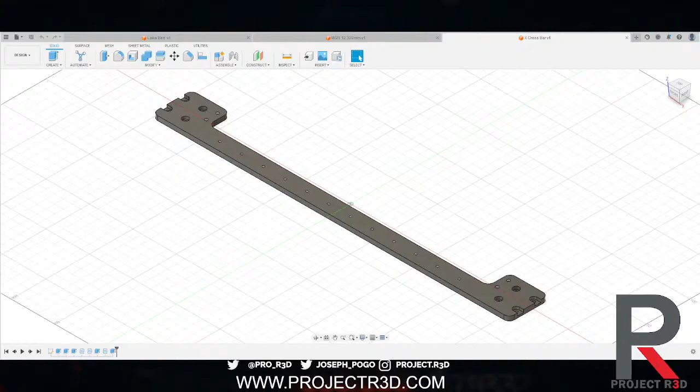I don't think we got anybody yet, do we? Well, maybe. Looks like we do. Are you on both? Oh, I'm on both. Oh, okay, it may just be us. So I just got the files pulled up from the old Apollo. Oh, we're getting some people. On which thing? YouTube, Twitch. Oh, YouTube's still quiet. I'm in the chat. Homie, it's me. Hi. What about chat? I try to chat, and it's like, no, you gotta sign in. Like, it's me.

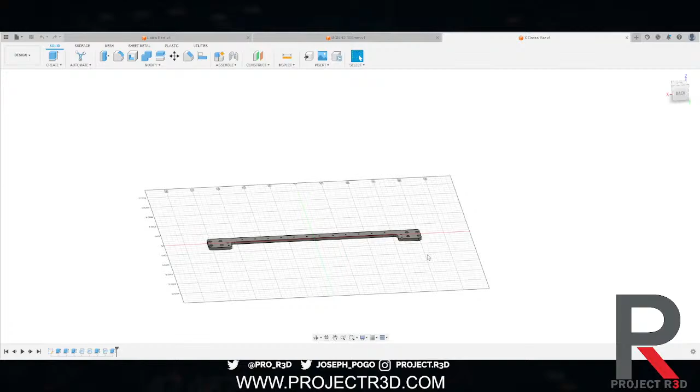Maybe this will show us a little. Nope, this was not even going to show us anything either. I got to find the right file to show you guys. But anyway, so we had the Apollo, you're going to see a couple of the files. So if you can see here, this is like a Prusa style bed mount, but yeah, it was a bed slinger. That's what we tested our breakboards on, which right now are sold out on the site, but we plan on getting some more in. And another thing we did was we were running the Duet 3 Mini. So we have a handful of parts left over from the Apollos, one of them being this... come on.

This crossbar - and this is how it was oriented on the Apollo.

You may hear my dogs yelping in the background momentarily, but can you hear them, Brandon? A little bit once in a while, but yeah, they've been pretty good. We can't have all the dogs up today because one of our dogs had a tooth pulled yesterday.

So anyway, we have some parts left from the Apollo, and there was a handful of things we liked from the Apollo that we wanted to keep around. One of them being the bed.

Do you see this? It's called a Laika - I don't know if you can even see that on here, but this was titled the Laika bed just because that was our initial name for the Apollo. Anyway, this is actually an MK3, so your MK52 style bed, 24 volt. We had them made by LDO. They were really nice. The big advantage is the flex plate.

The flex plate is one of the shining factors of this specific bed - this flex sheet that they're made everywhere. Everybody has an MK3 flex plate. If you want to go with...

What's their names, the guys down in Florida? PEX, the guys who make PEX sheets. I'm trying to think - Filamentum or... no, not Florida, yeah they were down in Florida. What was their names, Brandon? They're still around, they make the slap mat, they make the flex plates - Wham Bam? Wham Bam, so Wham Bam's got their own. Oh, I don't know, see what you're thinking about. Filament, they make their own. Gizmodorks? I think they're just a random place, not anything too crazy. I think they were around for a hot minute a while ago. Yeah, they sell filament and a lot of different things. Gizmodorks - oh yeah, you used to be able to get Garolite sheets from them back before anybody else had Garolite sheets.

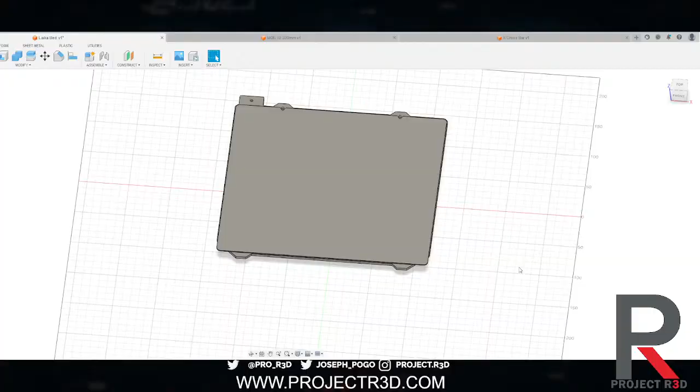Anyway, so everybody had these flex plates, and that's the big thing - if you want a specific blend, a specific way, you can do it.

So we want to keep this bed because we also have a handful of them. We already have these rods, or these cross braces, already milled, so we want to use them, and they're almost a perfect size. So the Apollo was a Core XZ.

What we want to make is a Core XY. So we do have a list of things, goals that we've set for ourselves. Right now our goals for this are: we want to be sub $1,000, it's going to be a kit printer is what we're thinking, fast as possible, easy to assemble. One thing we want to do is make it to where we're going to build a halo.

So we did a bunch of test fits for this, and we can show you some of those. This fit up was kind of our test - we'll put rails in the bottom for our Y, a rail on the top of this carriage for our X, and we're still able to use all the holes and everything like that.

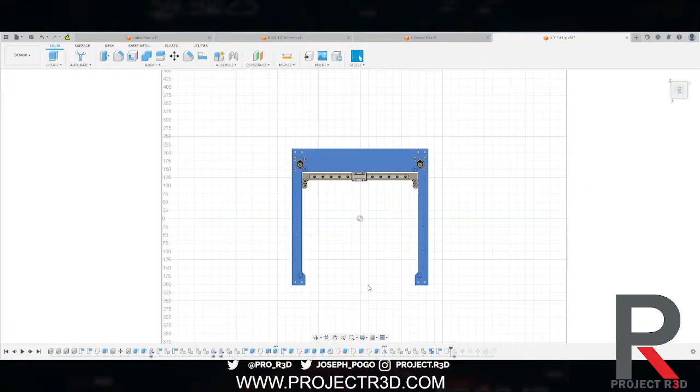A couple things, Brandon, if you want to add them to that list of goals for that sheet, is we want to have the ability to use the touch off system, the endstop.

Similar to the one that's off the build plate. Or are you talking about the magnetic one, the Euclid probe? Yeah, the Euclid probe. So we're going to insert a DXF because we have the original one that we worked from, and we're going to work from that.

Just call it the horseshoe. It gives us some kind of a design here. I don't know if I should rotate this. No, okay. So one thing was, on the original one, we were countersinking these bolt holes for the motors.

Well, if you do that, it limits the ways you can manufacture it. And one thing we want to do is have as many options as possible. We're making this in the U.S., we're a U.S. based company, we have to pay U.S. wages, but we want to be able to keep the price of the unit itself down.

So what we would do is go with 6.35 millimeter thickness. Of course we're going to work in millimeters, that's what we always work in here. So 6.35 millimeter thickness gives us a quarter inch plate.

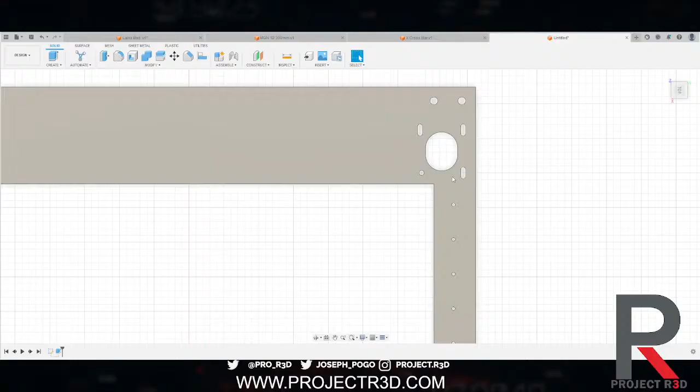But not having countersunk holes allows us to utilize different manufacturing methods. If we were to do countersunks, are those counterbores? Angled, yep, so they'd be counterbore. So if we counterbore these, so the heads of the bolts could sit recessed in the extrusion, we'd be limited to things like standard milling, using a vertical machine or a router style mill to machine this. If we stay away from any counterboring, we can utilize fiber laser.

Or you could do water jet. Water jet is super inaccurate when it comes down to holes like this - these are M3 holes. Another problem is we want these to be accurate, because this hole here is 3.5 mil, that's what it's set up for, a hole size set for an M4 tap.

So right now, the majority of this that's not going to change is this back right here. This area is pretty solid, the motor placements and stuff like that should work very well. We do have to add something here for being able to mount the third linear rail for the Z, so we're going to have a 3-point rail system so we can actively tram our beds. We want to be able to do that, and it'll be pretty accurate.

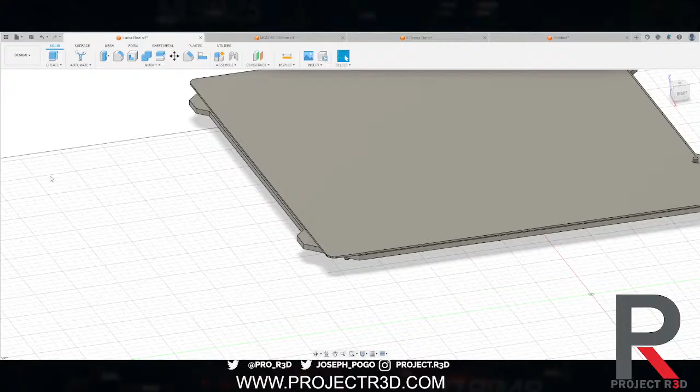You can, if you look at Prusa, it tends to stop the line - let's look here, pull this back up, sorry - it tends to stop the line like right here.

If you look at the bed at the bottom, the traces don't go all the way to these edges. So you can try to print all the way up here, but you're going to be limited on your heat dissipation from that side of the bed. So we kind of want to keep it in that area.

So what this is going to do is place this printer in between something like a Voron 0 and all your Prusa style printers for build volumes. It'll be in between those. Really, it'll be right around that Prusa style, but less than your 300 by 300.

But you're changing out that extra space if we went to a 300 by 300 for ease of flex plate accessibility, right? But also we would have to make a custom bed. And the way we make custom beds, we don't make PCB beds like this ourselves. We would have to go with something like a Mic 6 plate with a silicone heater on the back. Problem with that is cost, really. And since we're doing a belted Z, the weight of the bed is going to be one of our biggest issues. We don't want it to be too crazy heavy.

But one thing we want to do with these streams is design this whole printer live. What we'd like is if somebody has an idea, a suggestion, a desire to have a specific feature in a printer, let us know. We would like to incorporate those things.

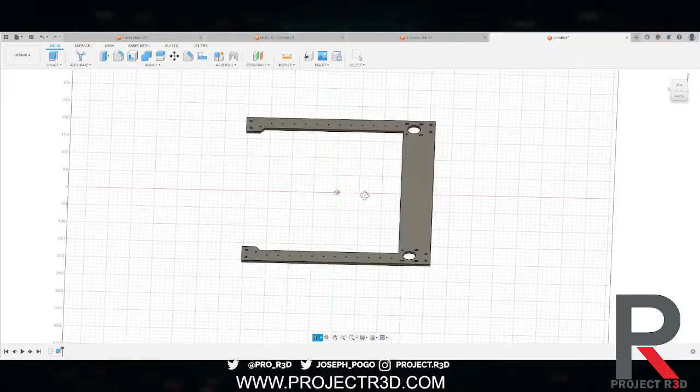So we do have this. What we're going to do first off is probably cut the fronts of this part off, because we're probably going to want to extend this, since I have some new ideas I'd like to try.

So we're going off of... no, is the Talos a desktop printer? I mean, it depends on the size of your desktop. Brandon, did I not talk about having a platform to go under it to put the filament in? So it's kind of a desk. It's kind of a desk.

So the idea would be I'd like to extend this out, mainly because if we look... let me pull up our old one so I'll be able to reference back to it quite often.

I'd also like to share this file online so people can tweak things to it. If people want to build this themselves, feel free, by all means. There are a lot of new ways to make printers now, which is awesome. A lot more things that are accessible to us.

Another thing we need to come up with is a name for this sucker. Right now it's called New Project. Before we were calling it Project Mercury, just because of Project Apollo, but those were internal names. We can't really go Project Mercury for release. Well... no.

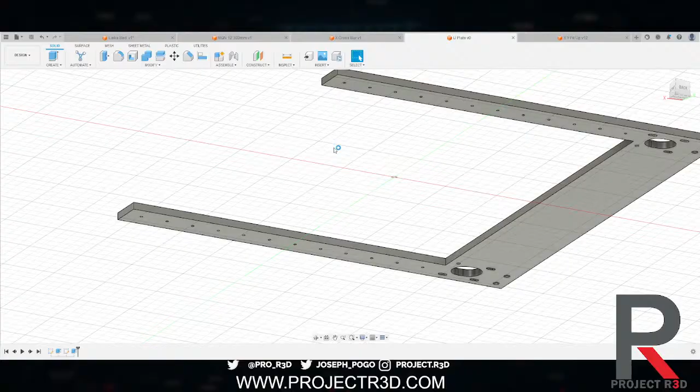So right now it's just called New Project, as you can see. But we can't really call it Project Mercury because there are a couple other printers out there with the Mercury title, and we don't want the confusion.

So one thing we do have a lot of is these 300 millimeter long MGN12 rails with the MGN12H carriages, which are the longer carriages. So we are going to be using those in this printer. So our base height is going to be the 300-esque.

Oh, come on, why you do me like that? Yeah, exactly Brandon, why do you have to be so rude? And of course it's not. I hate when it does that. It doesn't go to the actual center of the circle. So frustrating. And it's because these rails are designed with this line in them, which nobody cares about, let's be real, for most people it doesn't matter. Okay, there we go, just have to select the right thing. There we go, look at that. Lined up perfect, first try.

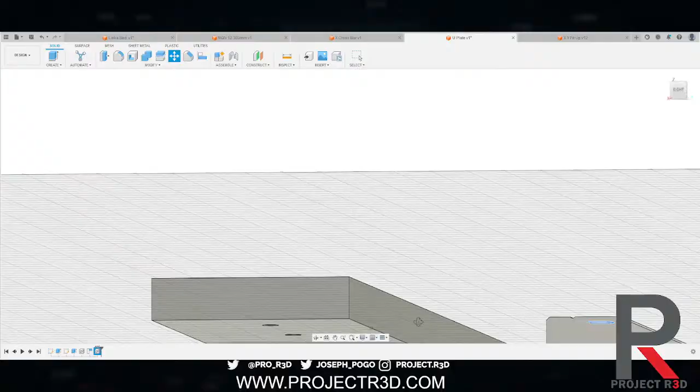Okay, so this is kind of where we're already starting. So we have Y rails, and then we'll mount up the cross brace. These things aren't really going to change the rail size for the X and Y, only because it's what we already have on hand. This is going to be kind of the update for the Apollo, this is what's going to change from the other design. So we're going to go here, go down here.

So if we look at the top down of this guy and the top down on this one, you'll see some changes. Let's go ahead and look at it the same way. You see how we've got the idlers in the front here, and here we've got the idlers in the back.

So when we were designing and doing fit ups for this guy, the carriage itself, we were having problems with where the belts came in and the options for extruders. If we were building a printer for us and said, hey, we're only gonna use a Hemera, we're only gonna use an LGX, we're only gonna use an Orbiter, that's fine, that's great, that's all snazzy dazzy.

The problem is we don't want to tie down this printer. We want people to be like, hey, I want to put an Orbiter on this, I want to make a modification to put the mini Stealthburner on this thing, anything like that. We want you to be able to do that. So what we're gonna do is move the belt attachment points to the back of the carriage, so you can hang whatever you want off the front. And that's the idea there.

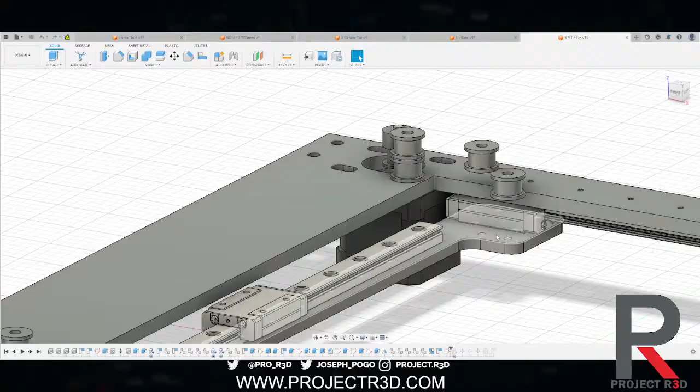The one thing I don't like, and you're always going to hear me complain about this, is the height from here to the top of this idler.

We can do it. What we're going to have to do is tie these two together. Shoulder bolts are expensive at the end of the day, so we don't want to go too crazy with really long shoulder bolts and stuff like that. We're going to have to go with hardened steel shoulder bolts. Not that big of a deal, but we're going to have them both be the same height so that we can tie them together. So you're actually going to have pulling from the back and from the front.

So we shouldn't really see any issues with the fact that they are that tall. Really, with the spans of these belts being so low, you're not going to have a crazy amount of tension on the belt. The longer your GT2 belts and stuff like that, the higher the tension it's got to be to get the resonance you want in that belt, to know you've got it to the proper tension. So because this is going to be a much smaller machine, you shouldn't really have those issues.

We do want to keep the same way of adjusting belt tension to the motors. We have a couple ideas for that, but we want to keep it off the front idlers. If you look at the Talos, we use a cantilever system. We could do that on this, but the problem is the price. The price of those metal parts and making them accurate so they don't wobble is expensive, and that's gonna hurt the fact that we want to keep it a sub $1,000 printer.

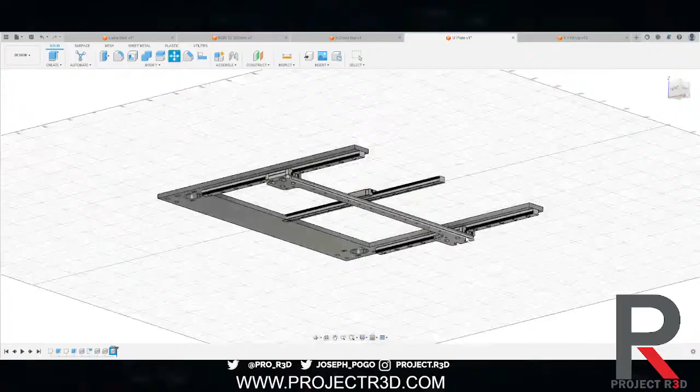And does anybody already have some suggestions on what they'd like to see in a maker-esque printer?

I need to turn this before I set this in place, but I'm an idiot. So you guys are gonna see, this is gonna be pretty quick modeling, and then what happens is I normally go back and put everything in their little categories and make it easy for manufacturing. But until then, see, I did it again. Idiot.

Luckily, we don't do this very often. Come on, pick the right thing. Didn't do it again. There, I think I got it that time.

Just got here, hi. Trying, wait. Trying to remember. Oh, never mind, I know who you are. I was like, I know this name, I know it, I know it. All right, how's it going? I'm glad I'm not the only one doing a line 5 times to get it right. Man, that's the story of my life. Fifth time's the charm, and I'll just cry during the first 4 times.

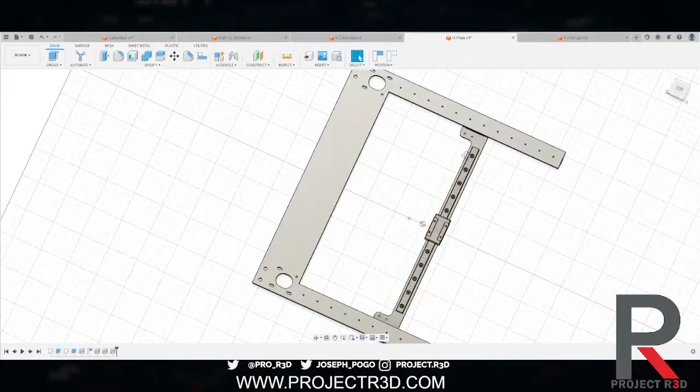Okay, so the motors we're using, we also have a standard motor right now. We have some fill-in ones because we use motors from LDO, so the rails are LDO, and the motors we use are also from LDO. We don't have the specific design for what we use itself, but these are going to be stand-ins, because let's be honest, a NEMA 17 is a NEMA 17. The only thing that really changes is the length.

These ones don't have a weird orientation on them, so, or weird. Come on, nope, and I picked the wrong one. See that?

Like a dingus. There it goes. Okay, apparently I picked the wrong one again. Because I'm another dingus. There it goes.

So our normal motors have the plug in the side, so these are kind of moot. Our motors are also 68 or 48 millimeters long, they're 0.9 NEMA 17s, 48 mil long. They're a little bit beefier. They are what we use on our X and Y for the open loop Talos.

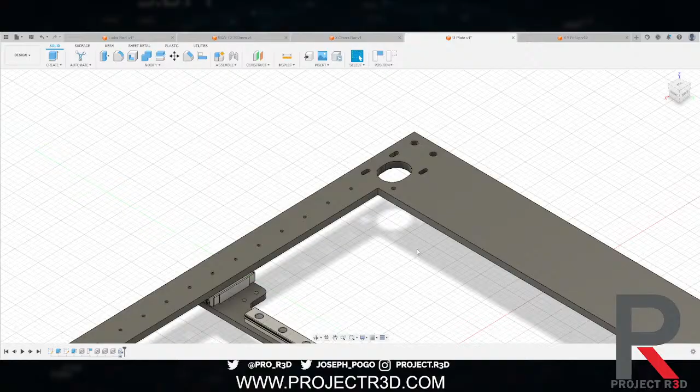It's also what we're using for the X and Y on the Talos. Currently on the Talos, with all metal parts on X and Y, we are limiting it in firmware, but it was able to outrun it if we took off the limits at 1,074 millimeters per second.

So you're gonna hear my dogs barking again just because my significant other came home and they are gonna lie to her and tell her that they didn't eat this afternoon. Which I should probably text her and let her know that they are liars and they did eat.

Let's get this plate in place. Right now, we're just gonna try to get everything kind of in spot so you guys can kind of see what we're working with. We gotta change out the front idler.

Nice thing is we can kind of go back to our sketches. Now look at this horseshoe, because I know this, if we put an idler, front idler there, it's going to line up perfectly to where we can hit that back motor.

So what we'll do is turn off this sketch and double check to make sure we don't have anything missing. Nope, okay, so I want to make sure I didn't miss anybody. So, what are your guys' favorite extruders?

I was starting to design this with the LGX Lite and the, what's the other one, Brandon? I already said it like 5 times. Orbiter. Okay, the reason why we can't do a Hemera on this is if we pull in a Hemera.

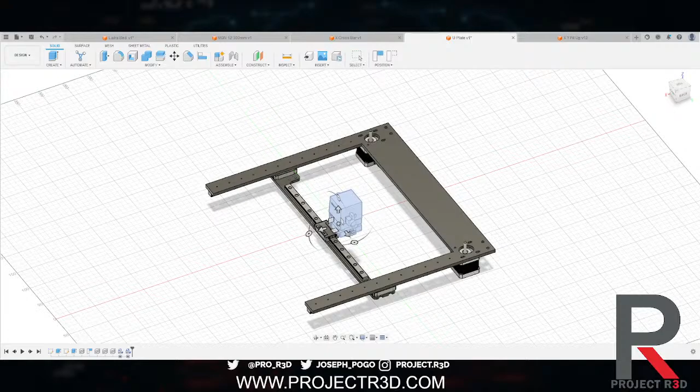I know I got a bunch of these files on here. Let's go off just the Revo. Or this is the only really Hemera you can get now, is the Revo one, right? Mm-hmm, and it's the XS, and they've killed the standard Hemera. So if we look at it off to the side here, of course it's all wonky.

This is the reason why we can't do the Hemera. We're gonna need like a 5 mil plate from the carriage up, so let's move up like 5 mil. The problem with the Hemera and a Revo right now is the nozzle's never gonna touch the bed. You're just gonna hit things.

Bambu Lab bed size is 256. Spring steel sheets available for that size now. Yes, the problem is those bed sizes are not readily available. I completely agree, there are a lot of spring steels. A lot of people jumped onto the Bambu wagon. Can't blame them, there's a lot of them out there right now.

The problem is I would have to get a bed made. I don't even know, does Bambu sell their beds by themselves? You would think they would. They're starting to sell a lot of their things. Let's look. Parts, right? The X1 series. Another problem, isn't their cheaper bed actually limited?

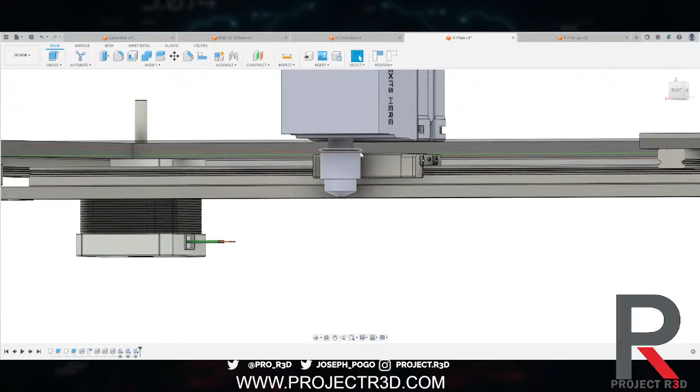And yeah, Bambu themselves has quite a few things. So if we look here, this is our problem. We're gonna have like a 5 mil plate here, and now this nozzle's never going to touch the bed because of our cross brace, which kind of makes the Hemera not available to us to use.

It's an AC bed also. It looks like a heated bed, AC heated bed here. Is it? Yeah, it looks like replacing the heated bed. No beds that I'm aware of for the V2 version, V3 version. Yeah, the P1P and the P1S are limited to 100C.

and are known for not being flat. That's one nice thing about the Prusa beds is the way they're tested. They are tested on granite plates.

LGX Orbiter is my go-to. Are you thinking the full-size LGX? Or are you talking about the LGX Lite? Have you done much with the LGX Lite?

Duke 8, don't let him lie to you. This dog is super convincing. He'll act like he's dying and he just knows he's going to get two more scoops of food. And he got two scoops this morning. He's a big fat fatty.

So we ran them on a couple machines, happy. Yeah, so we use the LGX full size for everything, and now they've got the Pro or whatever. Granted, we've destroyed the metal gears in the Pros, and the plastic gears in the LGXs are easy to replace. So we just keep the plastic ones.

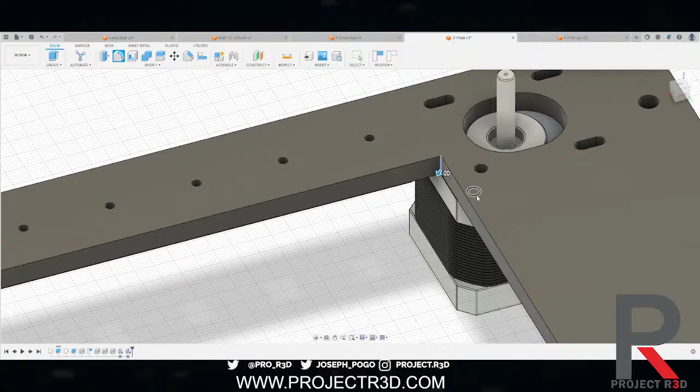Which, by the way, if you're making this corner right here, impossible—unless you laser cut it. Nope, it's not impossible, you just got to get one of them corner bits, the end mills that are square. You can broach it, yeah. That's an expensive process. Our electrical engineer, when I was working with IC3D, we convinced him that there's a tool for making square holes, and he didn't want to believe us. We just drilled out a hole and took a Dremel and made squares out of it when he wasn't there, and he's like 'what is this tool?' It was in sheet metal—that triangle bit that spins. It's eccentric, not concentric. It spins eccentric, and as it rotates, it makes a square hole. Really? Oh yeah, you sent me that before. That's funky.

So let's bring in an LGX. One thing we wanted to design first here is we want to just plot out what we would do for an extruder mount.

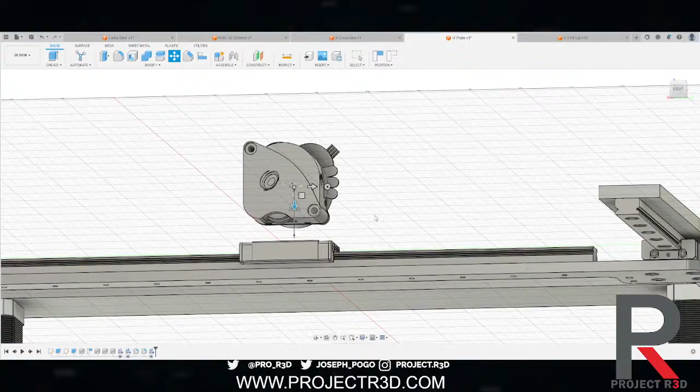Because one problem I've had in the past, and where I've screwed up, is I design the machine and then I design the head, which works about 30% of the time. What happens most of the time, like 70% of the time, is you design the machine, you design the head, and you go 'ooh, I want to add this and this and that,' and then either the head's going to be as tall as a skyscraper, or everything's just going to contact itself. And the 300 mil bed you thought you had—now the head's so big it can't move left and right. 50% of the time, it works every time.

So that's one of the issues I've had in the past—I need to design the head first, so if I need to move something, I can always reference back to this head design and make sure it's not going to contact anything. The biggest problem is you can design a head and then limit the features of the head. Let's try to get as much of this off the front as possible.

And then you go, oh, well, now I can't put as much cooling on as I want, or I can't put the probe where I need to put the probe. And it hurt - like in the beginning of the Daedalus, we sent them out with BL touches way behind the head, and that was a problem because of the offset from the nozzle to the mount to the probe, causing a teeter-tottering action which threw it off.

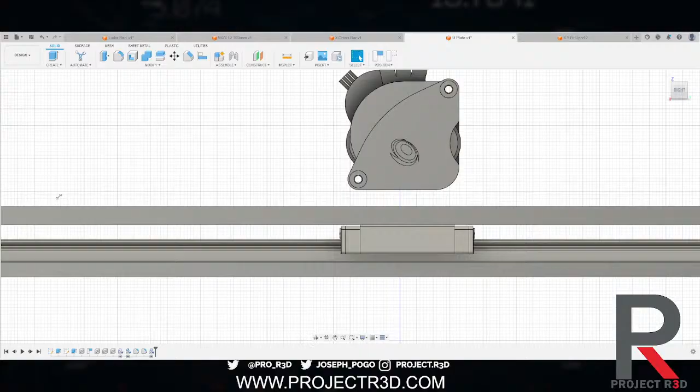And your stick of deodorant. And my stick of deodorant. I travel like an engineer.

All right, so the reason why I go 5 mil is on your non-beta. How about using the Daedalus head? You touched on that, didn't you? No, so we don't want to use the Daedalus head. We can bring that in.

The problem with that is the size. It'll use a full-size LGX, that's the problem. And with the full size with the Daedalus head, you cannot use BMG light, or LGX Lite, or orbiter - you can't because of the front plates. So I can bring it in here.

One of the biggest problems I had with the BL Touch was the probe crashing. The probe crashing if it got bent at all. But sometimes it wouldn't retract. Yeah, the failure rate was high. So before we sent out the actual printers, we removed it.

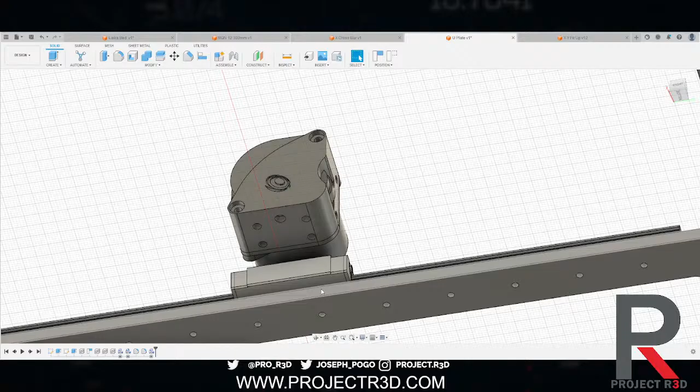This allows us to put the LGX Lite on here, and what we do is mount it off this bottom plate - just make a plate across. We've been playing a lot with sheet metal. So we're looking at both the Pinda style and the Euclid, leaving it up in the air for what people want to use. I want enough space around this build volume so we can move off the bed enough to do a nozzle touch off.

So the beacon probe, it's a really cool probe. The problem is the limitations in boards you can use. So we mostly work in Duet. We're gonna build a printer here with a Duet mini board, but we want to make it so the back panel for the electronics can be swapped, with multiple mounting points.

If you want to get this with electronics, we're gonna offer it with the Duet. If you want different electronics, you want to go with a Big Tree Tech board, a Manta, an Octopus, or something like that - by all means, you can do that and go Klipper. I know Duet.

I don't know if you can find that file, Brandon, or that link I sent you about duet testing a beacon style probe. You had to solder onto the tool board to get it to work for the SPI. But there is a possibility of Duet allowing that in the future.

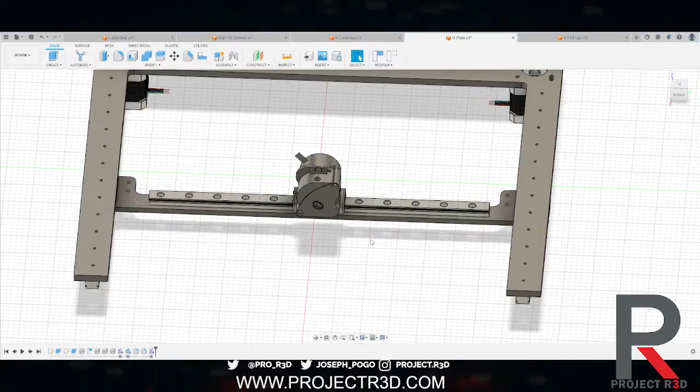Now I'm just curious what colors you're going with this time. So let's bring an Orbiter in here as well, mainly because I want to make sure we can fit all the mounting up that we possibly can. This is a 1.1, and I don't think the orbiters change their mounting points - people who use orbiters would know better than me.

Oh, I want to know what Mitch is going to do with that rack robotics DIY EDM machine. Did you get one of those? It looked like he had a box. Please, Kickstarter edition, Power core. Mitch, did you get an EDM? That's wild.

One thing we need to make sure is that we get our filaments lined up here, because we don't want somebody to be like, hey, I want to go from an Orbiter to an LGX or an LGX to an Orbiter, and then their nozzle not be in the same spot.

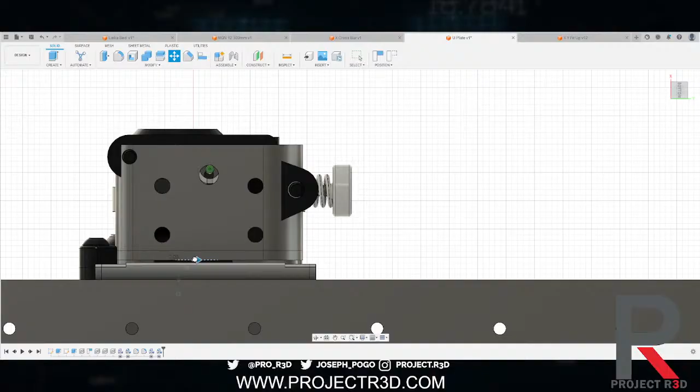It's a magic box, yeah. Put that on the little Voron Zero, man. No, you need to get like a Formbot or something, get something large to put that thing on, and just yeet it. So I don't know if you guys saw at Murph, but LDO was showing off a new EDM - backpack EDM, just sloshing around.

LDO had a new version of the Orbiter 3 that has a hot end built onto it. Kind of looks like a small version of like a Hemera or something, just shrunk down.

Another thing we should design for is the H2, the big tree. I'm gonna post some links in here. If you guys have ideas for extruders, start letting us know, we got a couple of them down. Big Tree Tech makes that extruder, right?

Smart Orbiter V3 suffers the Hemera problem - why? Because the nozzle doesn't stick that far down from the body of the extruder, so the nozzle might not touch. But the size of it, the H2 has a Revo option, right? I have one of these, and remember Brandon, it's got the real small motor.

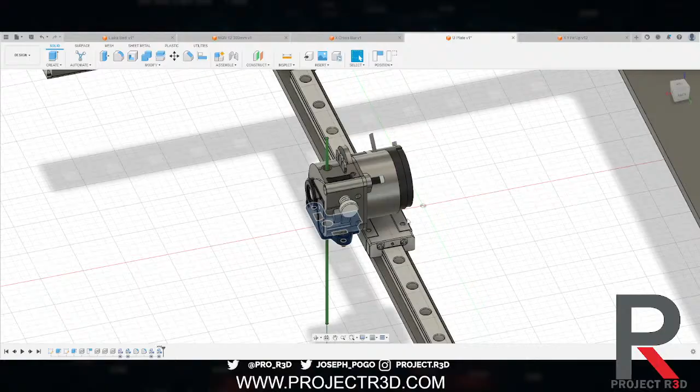I don't know if you guys pay attention to any of our designs - the H2 Lite's pretty cool, just because it looks cool. Anyways, we always put our extruders over our carriages, I really like doing that. That's kind of always a design goal for us, because then our weight is pressing down here and not hanging like a diving board off the side.

We could place it - I don't know if I can get a step file for this - but the BIQU H2V2S, we could put sideways. So we have all this space over here with the belts being in the back, we can make the heads wider, and we could hang it off the front if our little hearts desired. That's something we want to offer people to be able to do.

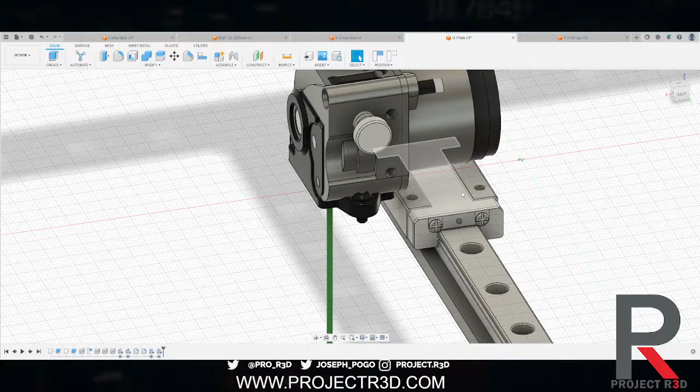But anyways, one thing is we started working a lot with sheet metal in the last few months. Well, actually, since last year, I've been working heavily with sheet metal. So one idea I have is to not get this made out of milled aluminum. Milled aluminum is a lot more expensive than laser cut sheet metal, which is what we're going with, actually. We're just going to send it out to Oshcut or Sendcut. We're going to get it made out of balsa. I think we'll have it EDM'd out of tool steel. I mean, we know someone who has an EDM. Mitch, quit your day job, we got a new job for you.

It'll take you hours. But yeah, one reason why I want to have this as far out as possible is because I know some people have been putting probes behind, like with the Voron V2 series of printers, they have that probe right behind. I don't currently like that, but if somebody wanted to do that, we could make this plate interchangeable as much as possible too. So what I'd like to do is sheet metal this.

Capture position, I want these holes. So we're going to start with a basic sheet metal design. Instead of trying to get around all these, I could make them go away, that would work. So now I need them back, like an idiot. I am very self-deprecating, just be aware.

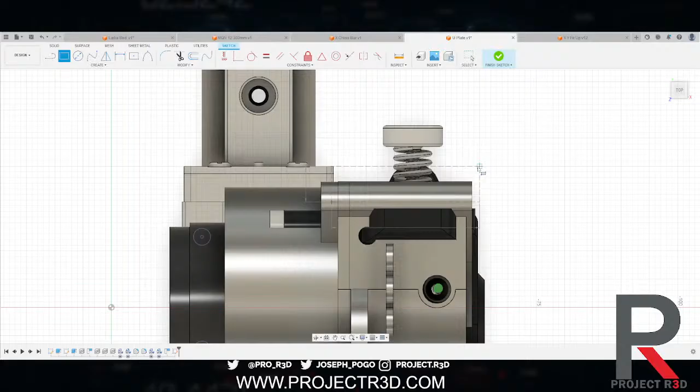We can get this up to here. Where's my thing at? There it is. Not that far up, you dingus. So if we went up somewhere like there, this is just rough.

We can go away with this, we don't need these now. But we do need to make sure that we're going back far enough. So let's do 40, no that's 15, 75. We need to make sure we're going back far enough here for our belts, right? So just going 75 is too much, but we're going to start with that.

We're going to go over sheet metal, because if we can do this out of sheet metal, do you see any opposition to this, Brandon? No, it'd probably be ideal.

Because then we can do a bend up in the back. Let's see if I still have my same sheet metal settings, yep, steel. We'll go steel, don't you think? Oh, no, probably aluminum. Aluminum.

So once we get the belts, we can do this flange up. Now we've made this a sheet metal part, we can do all of our sheet metal fun things. So what we're going to do is bring back our Orbiter light, and bring back our LGX. Get rid of these.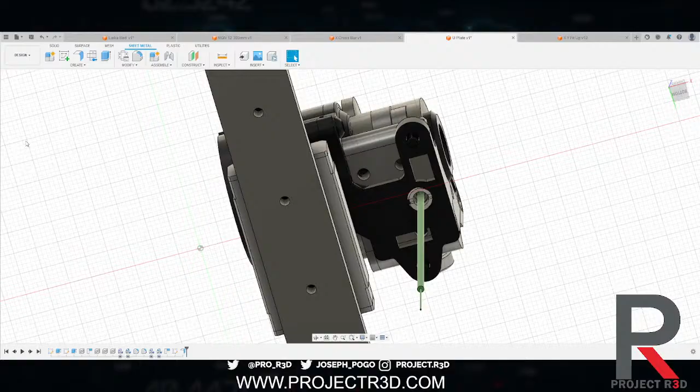This body, what we're going to want to do is bring back my body, because I'm going to do a sketch on the bottom, because I just like to roll that way. Oh, I just can't. All right, now that I've clicked on everything I shouldn't have clicked on, we can do the right thing now. No, I don't want your stupid bolt. No.

We just need our placements here. The way we're doing this is we're projecting with the P function. Get rid of this Orbiter, because the Orbiter's only got 2 mounting points, where this guy has 3. Oh, I just thought of something. What am I doing? I'm not even projecting anymore. There we go.

One thing we have to think about is with an LGX and an Orbiter, we need to be able to mount our hot ends, right? Because they don't bolt directly in. Okay, we got that now. Get that away, bring back our body.

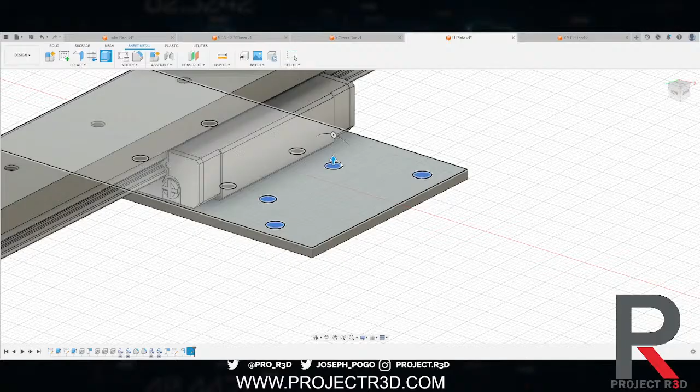This will give us mounting for these 2 extruders specifically, whereas these will have to be tapped, these 2 here. And these 2 have to be pass-throughs, because in the LGX, they have nuts in them.

I haven't seen the V3 yet. What are you talking about, Brandon? The Print NC. Oh yeah, I haven't even paid attention to the Print NC in a hot minute. No, I don't think I've seen it since V1. And it looks a little different.

And one way we're going to get the rigidity out of this part is the bends, right? Which right now we mostly do steel on, like the Talos, to make it very sturdy. We may do steel on this too. It's not going to be super heavy, so I don't think it should matter much. So these will be tapped. Let's just boop, we're going to go, these are 3 mils. Boop.

I should have just done that together, but I didn't. Not 3.5, 3 millimeters, so we know what those are for. So we have those.

Question here is, do we want just a hole here to pass this through, like a 4 mil hole, or do we want to cut out around this in case something does change? We probably want to cut out around it. No, you can't, have to be a printed piece somewhere unless you counterbore the hot end hardware into the plate. Yeah, that's what I'm thinking.

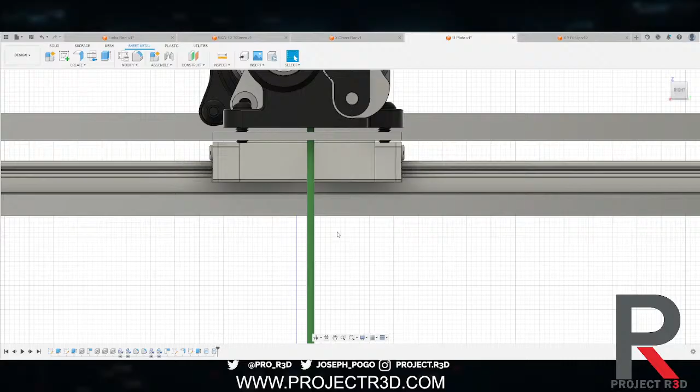We'll have to get a thicker plate, but then we can make it work with the Revo Micro. That's what they call that, right? Yeah, the Micro, you can make it work with that. And then what it does, it also gives us a little bit more space going down, because then you have the Pico hot end that was really small. I think it was teeny. I haven't heard much about that. No, I have one, I played with it a little bit. But hot ends keep getting smaller and smaller, right?

So making it to where - oh yeah, Pico hybrid hot end. And people are also using the Bambu hot ends into things. Yeah, that's true. We can make it to where people can just make this plate, and if we design it right from the start, people can go to OSH Cut or SendCutSend and get these made overnight.

Practically free, yeah. You can just go have it sent, and if you want to make your own hot end, if you want to do something wild and crazy, you can just get this bottom plate made. That's the idea. Any hubbub about that? Anybody like, you crazy? Definitely crazy.

You silly boy. So what we will do is, one thing is, there's a 3 mil. Just make another sketch, I'm an idiot. Maybe we should keep a counter of how many times I call myself an idiot. No, stop trying to rename me. I almost did it again.

No wait, that is wrong, because that filament is not in the right spot. Let's get rid of this body, because if you look at it, that filament ain't in the same hole. Oh, those don't look like they lined up either.

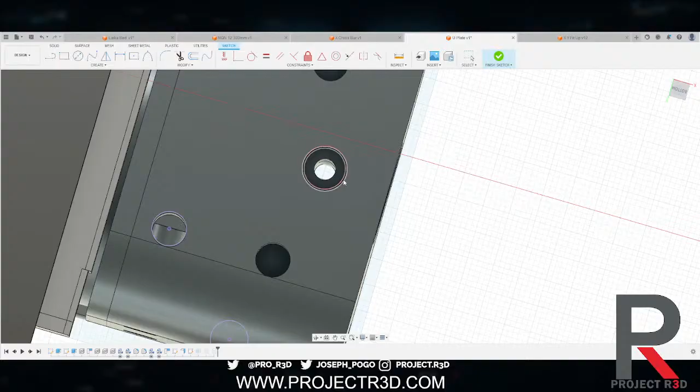Anyways, let's go off of the LGX Lite here. You may need to change the... So we're going to want... So this should be 4 mil, right? Yeah, for your thing. What we should probably do is not have the main plate be 4 mil, have it be wider. I actually have a project in my brain.

But it's acrylic. I've seen people make - what's their names? What's that printer I took apart, Brandon? You know what that printer was? No. Was it the Airwolf? Airwolf, there you go, okay.

So what is the external diameter of a 3 mil PTFE tube? It's 6 mil, isn't it? Right, so let's make this 6 mil. So if somebody wants to get a 3 mil Orbiter, which they do have the files for, they can use it. You see what I'm saying?

Oh no, I texted the wrong person about the dog. I bet he ate again.

Is it 4 mil? What 3? What do you mean, PTFE for a 1.75, yes. I'm seeing a lot of people selling the 3 mil by 4 OD. No, you don't want that, that's super thin walled. So you're not going to get good, especially in this situation, you're not going to want it, because the hot ends are built with 6 mil holes, so then it'll walk around inside of it.

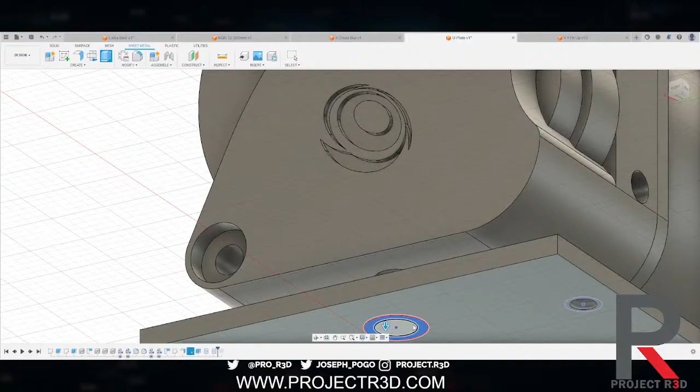Oh, but Airwolf used plywood to make their hot ends, which is just - okay, and then if you want a new hot end, they go, actually we won't sell you a hot end, why didn't you cut, you stupid - we won't sell you a hot end, you have to buy the whole motion system, and that's $1,000 to get a replacement hot end. Tell me how silly that is. Which I need to get back on that thing.

Okay, let's figure out what the spacing's all weird about. Yeah, it's not right.

So let's move this. Oh, what did I just do? I'll have to fix that. Go away, sketch, I don't like you.

Let me pick something that is relatively decent. There it is. What's the bottom of this thing? Let's go off of this, give me a full circle here. Jiminy Christmas.

It's got this screw thingy. Okay, in this design, this screw thingy is not centered. All right, we'll have to dig into that before we move things, because that's goofy.

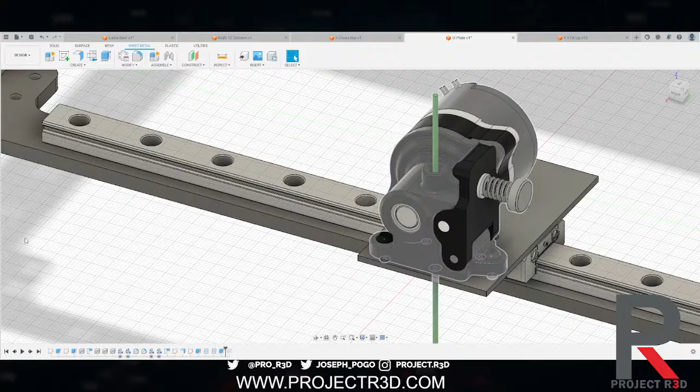No, Airwolves are not cheap. I'll happily send you pictures of the shattered hot end that just snapped right off. And it was a school, and they reached out to Airwolf, and they're like, hey, we have an Airwolf and the hot end's broken. And they're like, oh sweet, it's $1,000. And it is such a bad design. It is terrible.

It looks like these holes didn't get placed. Okay, they did. So let's place this all down correctly so we can work from here on what we're doing. Let's go off of this. Place that on this hole.

Okay, so even if we did this out of steel, we will meet the minimum thread requirement for M3 bolts with 3 mil plate. That's the standard for the amount of threads you need to get the proper torque on the bolt. Am I saying that right, Brandon? To actually get the hold down that the specification is set for the bolt, you need 4 threads. An M3 is 0.5 pitch, so we'll actually get 6 threads in a 3 mil plate. So we're meeting that minimum spec, we're actually exceeding it. So we do that.

And then these are bolt holes for the LGX, which, I mean, the LGX just looks cleaner. I don't know, is that just me?

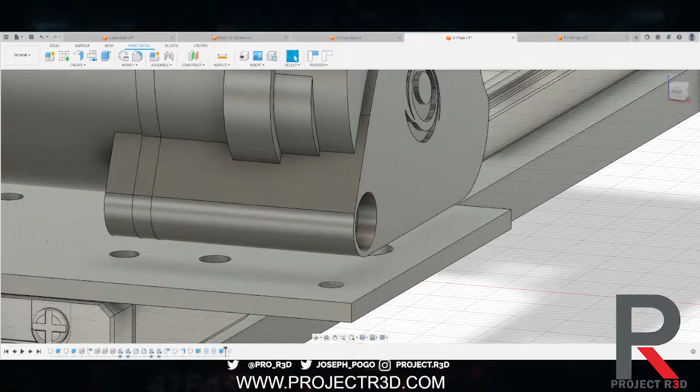There we go. So we're just gonna put some things here real quick, so that if I design this bottom plate, 3.2, we like to give it about 7 mil of space. We're just going to put these references here while I design this. They're 3 mil tall. So that I don't interact with that, right? See what I'm saying?

Voron V0.2. Oh nice. Don't they have... oh, the V0.2 is different though. I don't know, I only have a V0.1. V0.1, there we go.

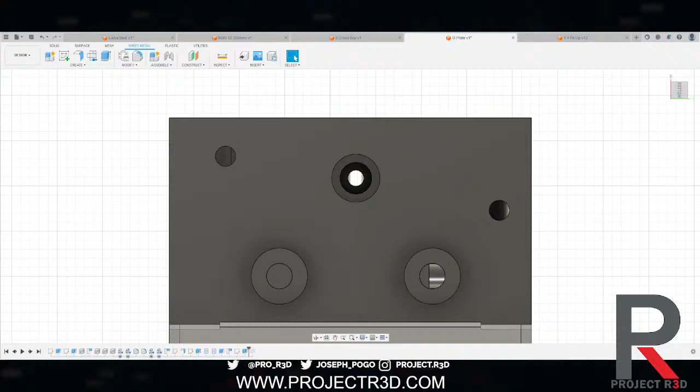And that is not finished. Yeah, so I'm gonna pull in that, how you spell mount. So we're gonna pull in our Revo rigid mount, Revo heatsink, to do our first plate here. Only because it's got the same mount up as a mosquito. So that'll tackle 2 of them right off the bat.

Why is that? Why are you the way that you are? You're just like your father. I didn't even need to do that. I'm an idiot.

So we're gonna add 6 mil to this in plates. What? Did you see that happen, Brandon? No, what happened? It moved, and it was like, yeah, we're good. And then I was like, all right. And it's like, yeet.

The old reverse odd-in. Yeah, so this cold side, then we're going to move it down 6 mil, because that's what it's going to be, 6. So we'll have 2 additional plates here.

So Manic, what are you working on now? Any fun things you can talk about for your videos?

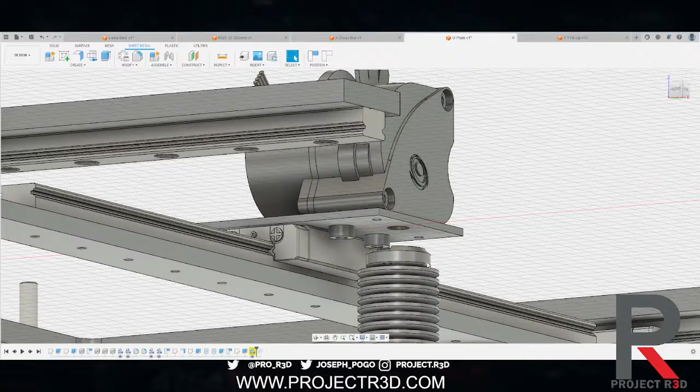How are we going to mount to this is the question. You know what I'm saying? They're going to have to be far enough out to be away from your hot end, but also close enough.

Finish a video about a display, designing the part for a client. How to charge for that? Oh, that's the fun stuff, figuring out how to charge.

So we're not going to be able to line them up perfectly beside each other. We're going to need to...

I think one thing that'd be cool, because I know Joel has been doing a bunch of print farm stuff, so what would be cool is for him to make a video on, why did I do that, on how he does his pricing for print farm work.

I know he was selling things a lot cheaper than a lot of other people though. So not the most fun video, but it isn't.

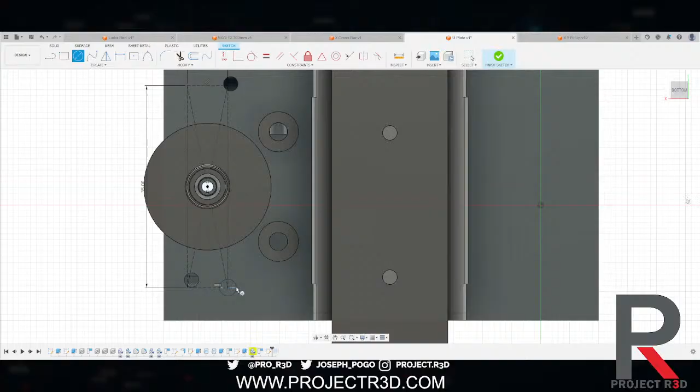So if we do, these will be tapped. 3. Just go 3 for now. We can always size up or size down depending on the plate we're working with. That was very nice, Brandon. Thank you.

So these 2 bolts, you think 2 bolts will be enough, Brandon? For the hot end itself mount. Granted, the hot end is mounted with 2 bolts anyways. Yeah, it should be enough, right? Yeah, the only problem is I would put 4, but then it lands on the mounts for the orbiter, which may be adjusting here shortly.

So the normal bolts that come with the orbiter, we're gonna have to work with those.

Okay, man, Pooch is a super good resource for that too. Yeah, I've seen a lot. He's been posting a lot of shorts and stuff lately, which is cool. So instead of jeans. No, yeah, he doesn't like jeans. The pants, he is in California.

Yeah, so let's go with a 15 by. Now it's gonna have to be probably 45. Let's do 45 for now. Oh yeah, it's not centered. Duh.

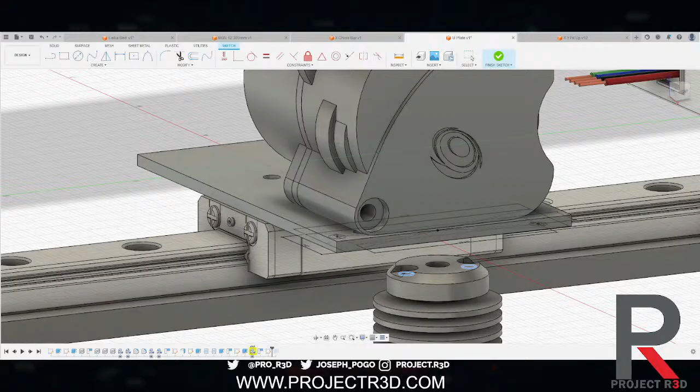Yeah, and then don't they have a 0.9 millimeter Allen wrench? Yeah, that's to be used on it. Well, if you want to take the whole thing apart. So let's look at the head size. The head size on an M2.5 is 2.5 mil tall with a 2 mil drive and 4.5 diameter.

So now we can take this cold side away. What we're gonna want is there, we're gonna want this to be 4.5 diameter. So we're gonna want this to be 5, and this to be 5, so the heads can sit in there snugly. And then this will be our top plate.

So let's take away this plate here. Bodies, take this plate away, we'll extrude. These ones don't need to be here. Shoot, let's just do it this way. Nope, that didn't do that. Gotta go back, undo. Like most of my life decisions.

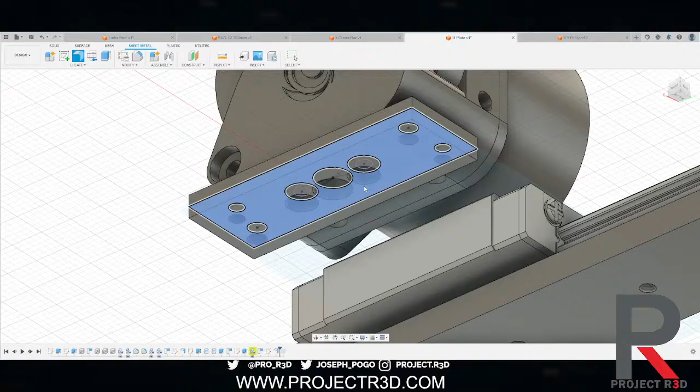Let's do it this way so that we keep our same sheet metal rules. We're going to go on side 2. Yeah, so then we can come in here and that one's made. Then we can come back, bring back our sketch here, and we're going to do it again. But this time we're going to keep this. What am I thinking here? Yeah, we're going to keep those.

Yeah, I'm doing it right. I know what I'm doing.

So you'd have sandwiching plates like this. Now let's get rid of the sketch. Let's move this plate and this plate down 3 mil. We'll bring this plate back in. What did I do there? Too far down, blah blah blah. Whatever, okay, let's move these plates up, because apparently I moved them too far.

Let's see, I'd like to know how far I'm off. I'm here, off I am here. Ignore my stroke. All right, I was off a mil.

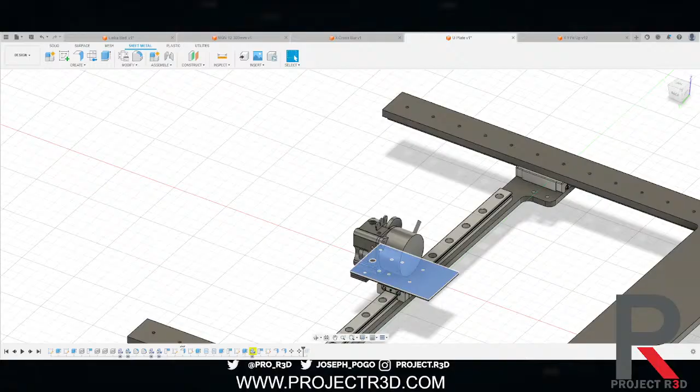So you'd have a stack, we're going to clean it up of course. But these ones we would make smaller, so that this main one—because you're not going to want to change out this top plate that often, you're going to want to leave this because it's going to have the belts mounted to it. So you don't want to have to remove this and rerun your belt, because if anybody's run a Core XY belt system, they know it sucks. So we want to leave this on as much as possible, which is why we're leaving the hole here larger.

So if you say you want to go, hey I'm using a 0.5 or not a filament, 1.75 millimeter filament, we would have these step down to 4 mil, so that your Bowden tube is retained. But if you want to go to a 6, all you have to do is change out these plates, mount up your hot end, and you're good to go.

So what we could do is... back to the sketch. I already did that one. Okay, what did I not do? This one, not that one. All right, now these should be good. They're not down to 0.4s or 4 mil.

So then what you do is this middle plate—this bottom plate, this middle plate isn't bolted directly. It's going to be sandwiched with this here and this here. Thought I got rid of these. So this here and this here would just pass through. The bolt heads would go here and here for your hot end mount, and then on this one the bolt would go... gosh darn it! The bolt would go through here and here, and bolt into this top right here. I'm an idiot, I deleted the wrong holes.

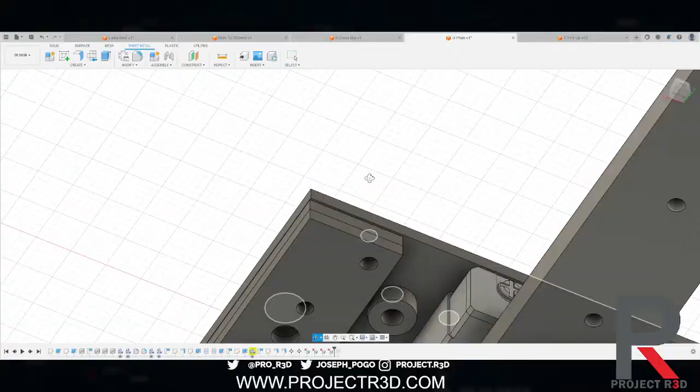Disregard my stupidity. These are the holes we're going to delete, because these are for the orbiter. So we'll clean that up. This is going to make it the easiest to mount your hot ends. And then this bottom plate and middle plate are the only things you're going to have to do a crazy, weird hot end, whatever you want to do.

These are moot points because... oh. Did I? This is part of what? What is this part of? Oh, because they were just references, we don't need them now. Just come down here to the extrude.

What are you doing? Why are you running? Okay, that's the wrong extrude—that one. Delete, delete. Oh, there we go. All right.

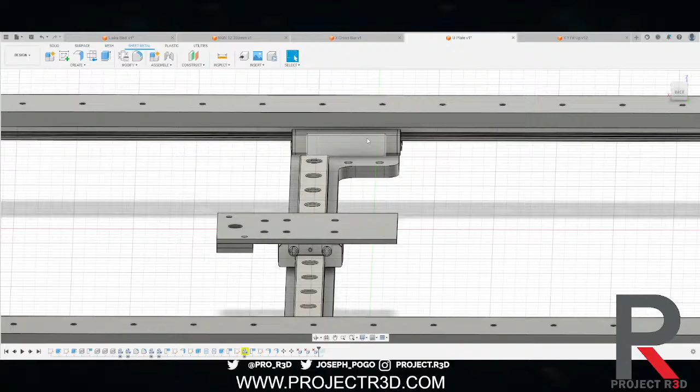So now the next thing we need to figure out is the belt comes in between these 2 points here. So we need to bring in an idler.

How long are you streaming for? Not sure, what's up, just curious. Oh, probably—at a time, no I did not set the time. Probably 2 hours, we're already an hour and a half in.

So we're going to bring in a Gates idler because that's what we use. Oh my goodness, sorry for the loud things, I just need to delete. Just exit out of that so it stops making noise. Place yourself.

We're just gonna copy this one over. Let's see what our spacing is here. So that's where our belt's gonna come out. Granted, they're not gonna be level like this—they're not contacting, they're gonna be stacked differently, kind of like the way this is, right?

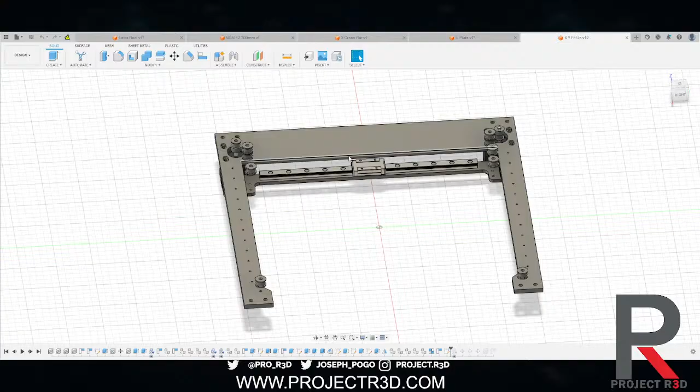But we look at the system here. Say this belt goes back to this motor, right, this belt to this motor, then up to these idler stacks, over to the back of this idler stack, then up and hits this idler and comes to the head. And then this one is the opposite—this one goes back to this stepper motor and comes up around, hits this idler and comes to the head on either side, right? So I'm just using this. Don't think I'm being crazy and just gonna melt idlers together.

What we're gonna do is we're gonna move these up. No, not to the side. Just want those high enough to know where my line is. This—I guess I didn't even have to do that. Let's move that back down.

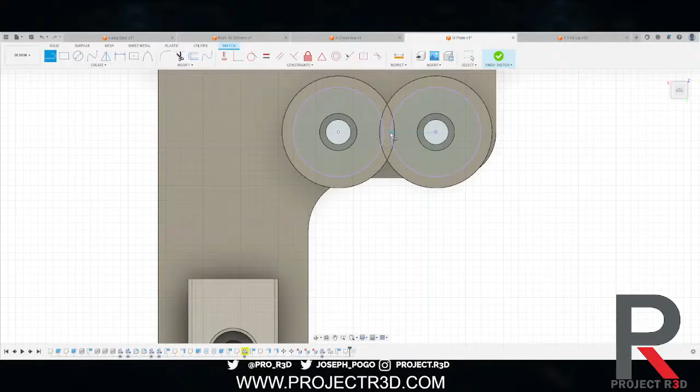What we're gonna do is, yes, capture position. We're gonna do some funky stuff here to find this location. We're gonna go like that, we're gonna go like that. That's gonna give us—what's this distance here? Stop doing that to me, you butthole. Sometimes fusion, you know.

Tie that one down. Now we can go across, and we can see that this is where this needs to be. Or to make this easier, we're just going to cut straight down. Like I said, this is going to be kind of the down and dirty design right now. What'd you do? Why you do me like this, Fusion?

And it's fine that way. Okay, so now if we're going to do a bend, we need a flange. It's going to let me do a flange here. Why, let me do this.

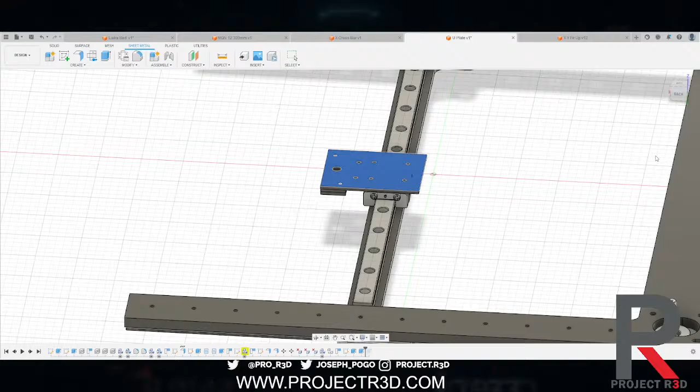Oh, it's probably mad at me for deleting that. Of course Fusion's going to be like this. Oh, because now it's saying that it's not... stupid. All right, we'll turn this into a sheet metal part again. There we go, 3 mil. No. What? Okay.

I'm going to change our rule here. Sheet metal rules, aluminum. Oh, I'm going to have to change that. Really? It's not going to let me change mine. What? Sorry guys. Boop, white. 3, there we go. Not sure why I kept moving there.

This design. Oh, oh, it'll let me change it here. No, oh, I just changed it. Here, let's do this. Nope, not save it. That's a bad idea. Just gonna have to revert a little bit here, because something went wrong, and I didn't catch it when it happened. Oh, that's right.

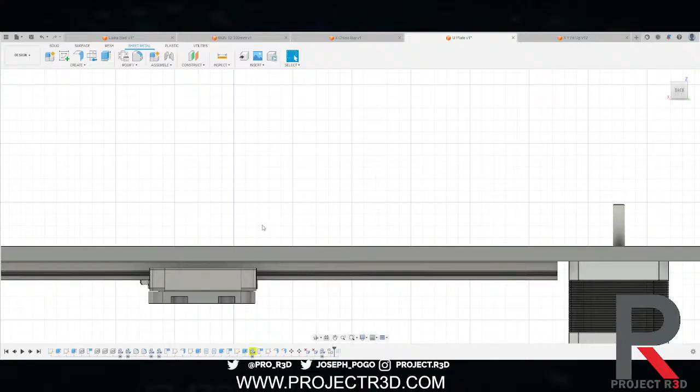Oh, by the way, if you guys don't know who Brandon is, you should. He helps out me, helps me out a lot. There we go. He's the one you see at our booths at events. I'm just here for good looks. That's true too. A lot of people for some reason go to him thinking it's me, except that's like a major insult to him. But yeah, he's been...

When did we meet, Brandon? 2019? Yeah, MRRF 2019. Brandon started out as a customer. I paid my way in. Yeah, he paid his way into friendship. Really what happened was they walked up to me first. They went, him and his wife, and talked to my girlfriend.

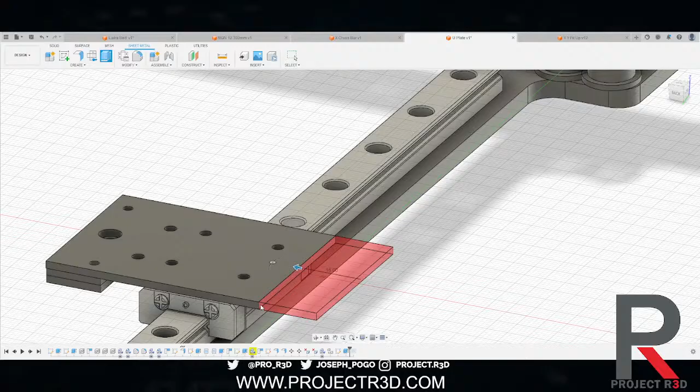The cool one, yeah. And then I don't remember what I was doing. I was doing my normal walk around the event and not being at my booth, type of thing that I do at all the events. And then they ran into me when I was drinking. Yeah, we got some ciders. No, was it ciders or ginger beer? Ginger beer, I think it was ginger beer. Yeah, I think you're right. Pretty sure it was gingy.

And what is going on here? It's not letting me flange it now. That's so weird.

See what I'm saying, Brand? Mm-hmm, I'm not super versed in the flanging. The flanges, the phalanges? Is it because the drawing's not there anymore, or because you went past the drawing since you did the push pull? Are you more of a metatarsals kind of guy? Instead of the phalanges? Sorry.

Did you see that Hank Green TikTok? Sorry, side tangent. Where he's talking about busting every bone in your body. He's like, well, there's a lot of small bones in your hands, there's a lot of them. It'll take a while. Yeah.

What is going on here? I'm wondering if my current rules are funky. There we go. I wonder if it was just trying to say no, you couldn't bend. Nope, it's still being a motherless hoe. Why you do me like this?

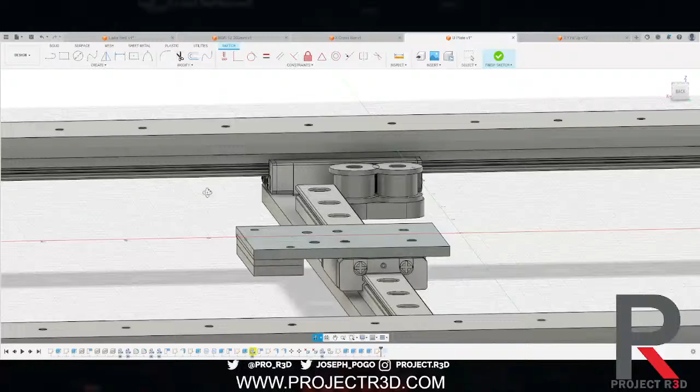All right, want to see something cool? We're just going to go like that, and we're just going to act like this part doesn't exist. And I don't know what... Oh, it's saying it's still 5 now. Okay, okay, whatever bud. Sure there bud, you're just a silly goose there bud. All right, look at this. Ta-da! Professional. We're just gonna act like it never happened. Nobody saw that, right? Has not been seen.

Make sure everything's lined up. All properly like.

Boom shakalaka. All right, oh, that stuff's not lined up. This all should be like 1 mil too thick now, or too high. That's what. So much is making sense now. Because I moved that down 6 mil, and then it wasn't lining up. Now it all makes sense. And I should have caught it earlier, but I'm a dinkus.

No one saw that part end up. Yeah, like I said, this is a very dirty, down and dirty VHB and zip ties

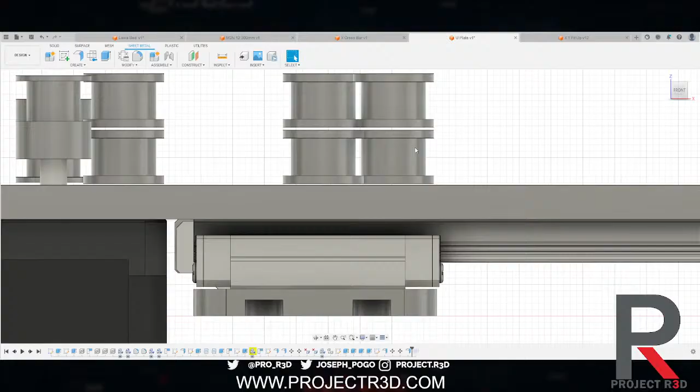design. The one thing I have to worry about here is, yeah, we should be good. Because if you look here, both of these idlers are above this bar. Right? And that's what we absolutely need. We need to make sure that this bend ends below this plane.

But how high above this plane do we need to go? I think it was like 20, 75. So let's go 25, so we have space above the belt.

And I need to modify this. Come on, rotate the right way. You dumb, stupid, dumb.

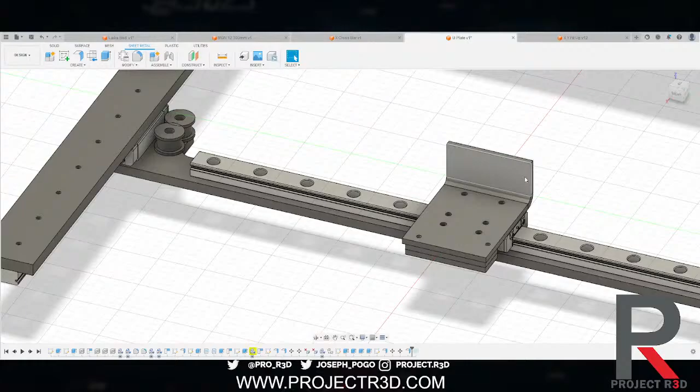Okay, it looks like 6 is the plane. Yep, so then we go another, so 25, yeah. So then we can just bend this plate, so this plate stays standard. And we can have a clasp on the back to where it holds the belts in place. Zip ties, yep, that's how we do it. But yeah, so then we'll make 2 slits here so that the belts can come in.

And then what this will allow us to do is give us a lot of space around. So if you look at just your... come on, this is what I'm looking for. If we look at this, we have a lot of space around it for fans. We'll have space in front of it for fans, and also below if you need it.

I don't like the fact that this is so wide, but for the mounting, I think it's gotta be, to give us the most accurate... what are you doing here, hole? Go home, go home. So, yeah, we'll be able to put fans around.

The big thing is spacing, right? So, did you say that's the max height you can go with that bend? No, I can go much higher with that bend. Just how tall is the tool board?

Here's the problem with the tool board. Here's the problem with the duet tool board. Let's go with that.

Let me pull up the file real quick. Then Talos - what time is it? How much time have we on here? Hour and a half, okay, I want to spend the last 15 minutes breaking down a Talos component. So just make sure that I don't overrun here.

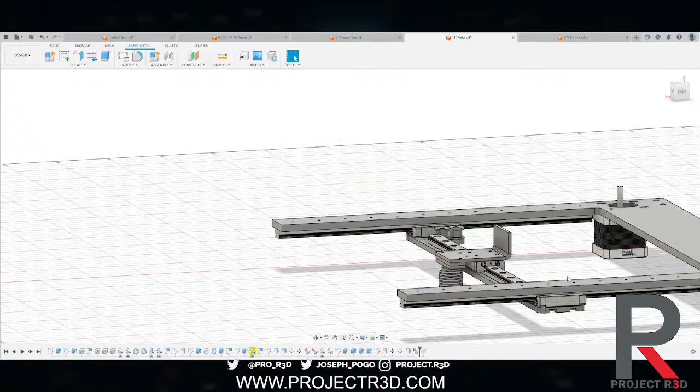Because, yeah, so bring this in. This is the biggest problem here with these ones. Just look how chonky it is. And Duet says they know that this is a problem. But it's wider than the carriage set is.

See what I'm saying, Brandon? Yeah, it's bigger than I remember. For some reason, I was thinking it was only like 30 mil. No, she's big, she's chunky. But yeah, that thing's huge. Yeah, it's stupid, it's real dumb.

And they have all of the wires coming off the sides, which is just... it has it coming off all the sides. And don't get me wrong, like you said, there's some of their stuff, it seems like there's not thought behind it. But it actually, I think it had too much thought behind it.

I think that's what the tool board's problem is. Because if you look, this is a bolt hole pattern. That's a strange bolt hole pattern. What's that for? That's to mount on the side of a Hemera. Well, what if you don't want to use a Hemera? Well, why? Like, the problem is why wouldn't you want to use a Hemera?

The whole thing was this was designed specifically for the tool changer. Oh, is that designed for the old Hemera too? They have an old one. This is the newer one with the smaller. So if you look at the fit on the XS or whatever. Yeah, to fit on the XS rather than the standard Hemera.

But if you look like this, I believe it should be this way. So this is your top power can, and then this is your hot end stuff with, let's see, your fan stuff like that. So it goes back around.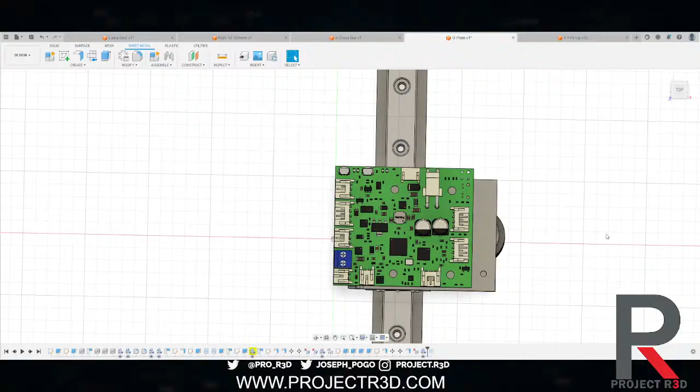Do you want to show off the Talos some? Yeah, well, let's wrap this one up.

Okay, so this is the start, right? What we'll do is we'll do belt pathing next time, with all of our idlers. We'll do belt pathing, and then we need to start working on Z at some point here pretty quick, so we can figure all that out. This shouldn't be too crazy of a setup.

Ooh, one thing I just thought of, Brandon. If you have a... what am I looking at here? We put an orbiter on here. Will it contact those carriage holes? We may have to space the orbiter up, because the holes for the carriage, you can see them highlighted there, they'll contact. Yeah, okay, the LGX could get away with it with 3 bolts, but we'll probably have to space them up, which is not that big of a deal.

Anyways, so what we've done here is we kind of got our tool head set up. This is ugly, this is not what it's going to look like. If you guys have suggestions, of course we're going to clean it up, make it look a little better, but we want to make it to where it's modular.

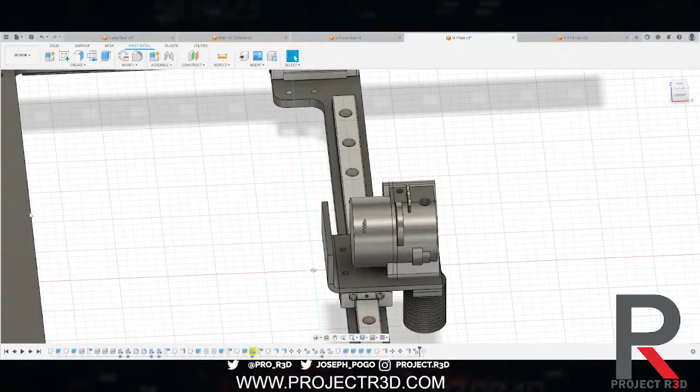You do have a little bit more space on the back here. Let's make sure the orbiter will fit if we space it up, so that we can make sure everybody's going to be able to use the hot end they want.

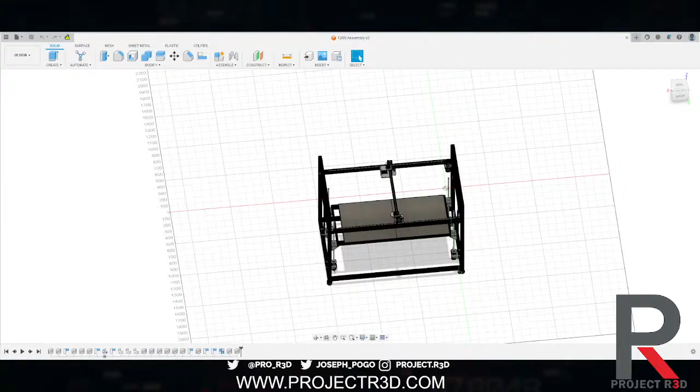We'll open up 3 things here. All right, there's the 600 — this is what everybody's been seeing pictures of. And then the side-by-side should be opening up here as well, so you can see the size comparisons. This is the one that we've been showing pictures of this whole time.

It gets much larger. Okay. You don't have a Daedalus model to throw against it, do you? Nah, that's just wrong to do, Brandon.

Open the inside of it. It should fit on the bed of the 600, the whole printer. Mm-hmm, okay, so 600, get it from the front.

The Z — so one thing I'm sure a lot of people have seen is that this looks a lot similar to things on the market, mainly like a Modix. I've talked to a lot of people who have used Modixes, and a lot of them despised the assembly part and just how much extra fluff of metal parts are on everything. That's why we were able to get this thing moving so quickly. There's going to be covers on all of this, of course, but right now, and of course our Chimera model is ugly, not pretty.

So our X head, our U head — we've got a main sheet metal part here. It's bent up, this is all steel sheet metal, so it's going to be very rigid.

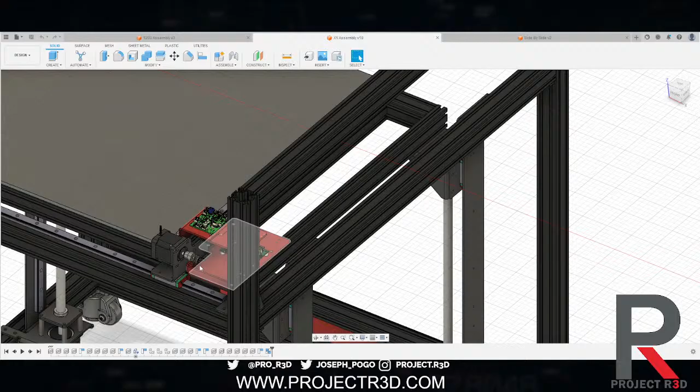So we'll have these 2 motors fed directly from the main board, the X and U. We'll have a cable chain coming up, it mounts here. This is moved quite a ways back than what it would normally be moved back. You'll have those come up, and they'll plug directly into these motors.

For the tool boards, which are the tool boards we were looking at on the smaller printer, you'll have 1 CAN wire come up, plug in here, power wire come up, plug in here, and then it splits out into 4 individuals. So you could do more, granted we're only going to be using 2.

You have your 2 cable chains that'll come out. The cable chains aren't on this model only because when you're doing rendering, the cable chains are really hard to move around and whatnot because they don't move. Actually, they're kind of set in space from IGUS.

So if you look, the whole Z motion system is a whole subcomponent. This whole crossbar is a whole subcomponent. And then the whole bed system is a whole subcomponent with 40/40 extrusion going across, whereas Modix is using 20/40 to go across, and it's just not enough. Another thing Modix did was they're using a 40/40 pattern, whereas we're using a 20/20 pattern.

Yes, Modix, it's a Modix FU. The Daedalus was an FU to some other printer brand. The Apollo was an FU to another printer brand. Let's be honest, the reason why I started Project R3D was because I was just tired of the crap that was being made.

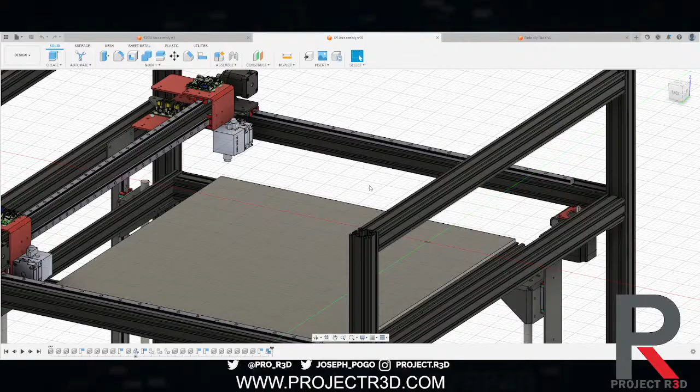One problem with the Modixes is they use one bolt into the end of each extrusion because it's a 40/40 pattern, so it uses like I believe an M8. Whereas we're using a 20/20 profile, but in 40/40 mil, so we're going to have 4 20 mil M5. It's a solid reason to do it.

Yes, it is. We're going to have 4 20 mil M5 bolts, so our clamping force is going to be much higher than that, like a single M8. It's also going to index it so it's not going to spin or anything. Everything's going to be a little bit more strongly put together, let's put it that way.

So one thing that's the way we're doing our Y is NEMA 23s. Your motor goes to the bottom, and if you've messed with a NEMA 23 in the past, the motor itself is not tapped, there's no threads on the motor. So it's a pass through, and then this top plate - it doesn't show it on here - but we had the top plates made with a nut that's welded onto this top plate. So it's very strong, and it'll sandwich together, and it'll be able to slide 10 mil. You'll have 10 mil take up in the belt.

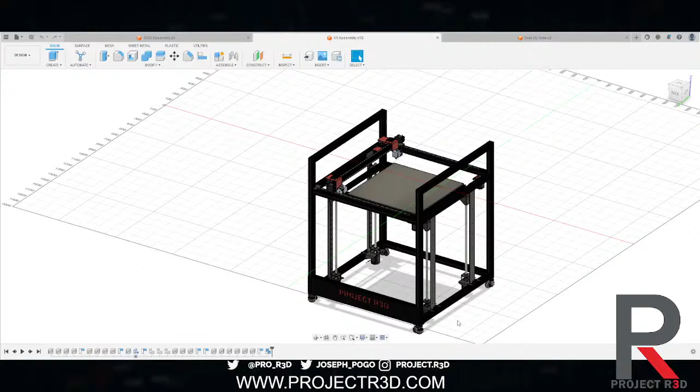One thing Modix does is they sell it with linear rods for Z, and they want you to pay like $900 to get linear rails. Ours comes standard with linear rails, they're MGN 15s. On Z and Y are MGN 15s, and X and U are on MGN 12s with the H carriage.

The big thing is even if you don't get the enclosure, this bottom panel with our logo will be there. This right now we're kind of deciding on one of two things: either having it just painted with another color material on the back, or lit up red. I like the idea of having an LED panel down there and lit up red.

And of course, in my head, I'm like, oh, it could be a status indicator, but you don't really want that, it'll be on the display. It will have a display over here.

The big thing, the reason why we're coming out with really 3 sizes is because - let me see if my simulation stayed, no, my animation stayed. Did it? So it's an ugly animation. All right, let's bring this down.

But if you see here, each end of your Z motion will come assembled. I don't know where that one is, that one just yeeted itself off, but there's another extrusion right there. Anyways, these will all come pre-assembled. You'll have to put on these 2 other isolated ones, but these just slide down.

So what you would do is you get these front plates with your Y motion all built, and your X and U completely built. There'll be cable chains on this, and cable chains on this back portion. All you do is bolt this down. Really what you do is you stand it up.

Let's play through it real quick. So it's in reverse, sorry guys. So yeah, you'll stand these 2 parts up, and you'll slide in your sides.

You'll put on, first you'll want to put on your bed. So it just drops down on your Z components. Oops, wrong thing. And it bolts directly on top of your Z components.

And then once that's done, you just drop on your X and U and bolt it. You'll then have to tension your X and U motors, but other than that everything else should be golden. You'll have to bolt on these bottom belt clips, so this belt will be tensioned from us.

Casters come on the machine. Enclosure is going to be an option. And IDEX, from the fact right off the bat you're getting IDEX, it's going to be a little bit bigger than a standard Modix or Make It printer.

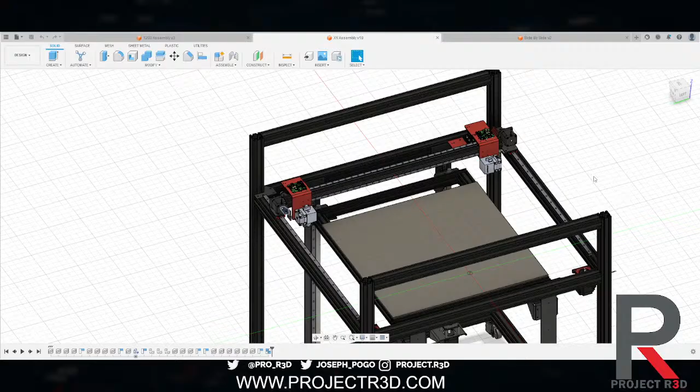Only because we want the head to be able to go completely off the edge of the bed, and we've got a lot of extra space that the heads can run over here. Mainly because we want people to be able to use a touch probe system, kind of like a Klicky probe style machine, but a higher end probe.

And we're going to have a camera, an offset camera here, we've been testing, so that you'll be able to run it - it'll be a script that you run your nozzle, and you'll be able to adjust your offsets from nozzle to nozzle. And then we also want to have a nozzle touch-off probe on this end, so that you can probe your whole bed, and then go and touch off each nozzle, and know exactly what offsets you're set at.

Just trying to make it, because this is going to be a very large bed, so we want to make it as user-friendly as possible to get a very good first layer.

So, but yeah, then, so there's this one. Let me, front, but it says back. Oh, second. Nope, I have something else to show you guys.

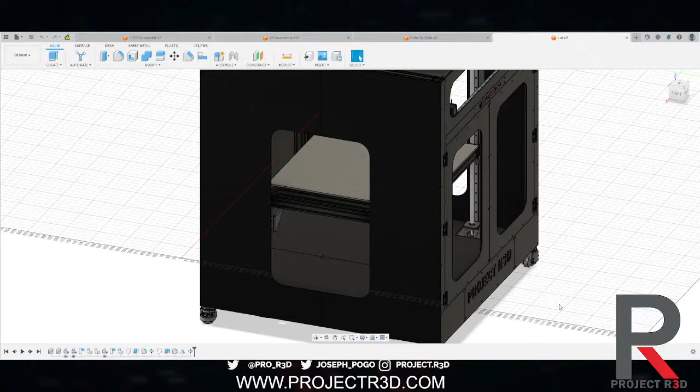The next thing we have to do for the enclosures, once we get it on, extruder options. Right now we're doing the Hemera with the high flow Revos, but extruder options are going to be kind of open, because yes we're going to start with that, but the Mosquito Magnums, the Mosquito Magnum Pluses would work really well on here with an LGX.

So one goal I have is I want to be able to bolt on a QR extruder from Bondtech with an LGX, or a QR 3mm onto it with a Mosquito 3mm, because I have a lot of 3mm material that I could just push out. So that you'll be able to, the goal will be to make plates that you just bolt on with and be able to utilize everything.

You may lose a little bit of Z, but right now we've already got it built in with 650 in the Z and not 600. But like I said, these 2 panels here will actually fold down.

So that you can access your linear rail to lubricate it, tension this motor if needed, and tension that motor if needed.

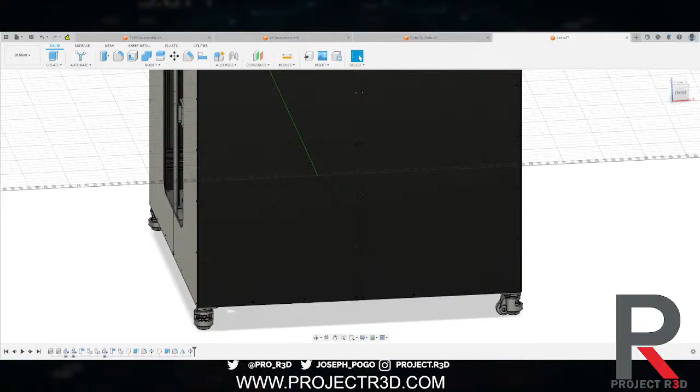So are you thinking about going laminar flow style? Are you thinking laminar flow across the area, or just on this thing? You could definitely fit one back here. But right now we were looking at the 5015s to start, and they snug up on here. We'll add a bolt hole pattern on the back for the 5015s.

Haven't used the 4028s, but I know not for printing. I've been around those jet engines when I was around servers, and they're spicy loud, spicy to the ear.

I know we're at the 2 hour mark. If there's anything specific, let us know, and we can probably dive deeper into each thing on the next stream. Part cooling, they work well. I haven't looked at the Eva in a while. I just typed it in so I can look at it. So yeah, we'll look at that and see what, because right now there's a lot of that stuff that's done already.

The system, where this is right now, is planning jigs out for everything for quick assembling. So the idea would be every one of these units would be assembled in house, then disassembled, put on a pallet, and shipped out. Yes, this will be a palletized machine, mainly because it's going to be a small pallet. It'll be flat packed. Right now we're speculating it being no more than an hour of build time.

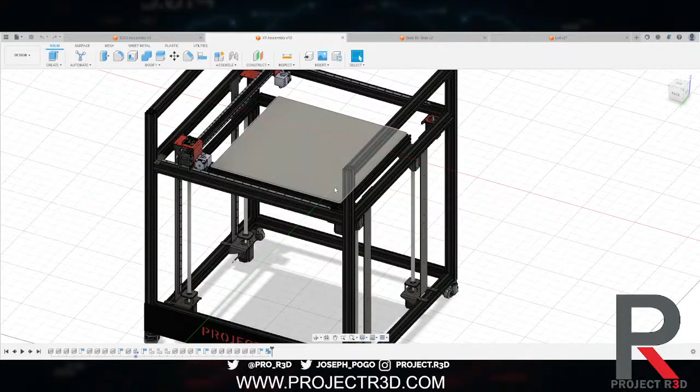Because if you look at the bottom caster mounts, we're going to have plates in the bottom that this just slides down, rests against this, and all you have to do is put jig plates on the outside to make sure that it's all sitting square, and then bolt it all down. So assembly should be very quick for this machine.

And then everything will be wired in subsections. Then you just mount up your electronics box and plug into the quick disconnects on the outside of the electronics box, and you're ready to go.

Yeah, and if you guys want something specifically torn down, because we have our subsections that we can tear down - I'm a big fan of my Z motion. By the way, this is steel. So yes, this is only 3 mil thick, but it's very rigid material.

So quick disconnects, yes. We've now recently switched over to the Molex Nano Fits. They're capable of 6 amps of power each. So any communications go over that, and then for our power, all of our power quick disconnects, except for right here - those are screw terminals - the rest are all Anderson power pole connectors, which are capable of 30 amps apiece.

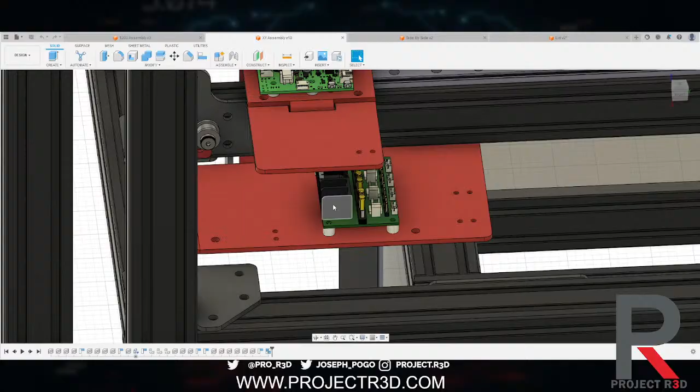The bed itself is AC, so you are going to need a 15 amp breaker per bed. So, which is kind of sucky.

You okay there, Brandon? Yeah, no, it's a lot of sounds going on over there. But yeah, drinking water. I got you.